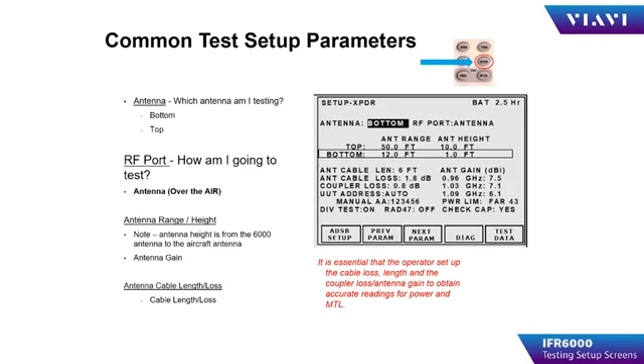When the operator chooses antenna for over-the-air testing, there are two important parameters. First is distance from the IFR6000 antenna to the aircraft antenna, and second, the height difference between the IFR6000 antenna and the aircraft antenna. These are critical to the IFR6000 for determining ERP and sensitivity.

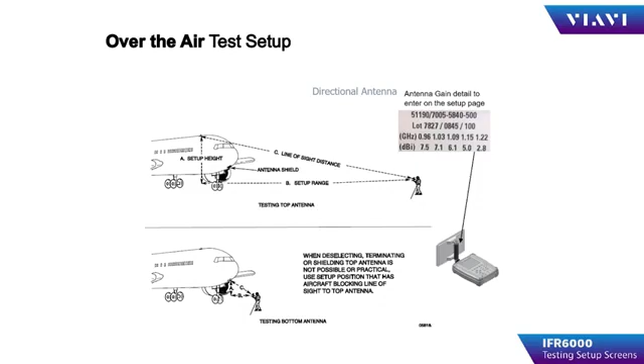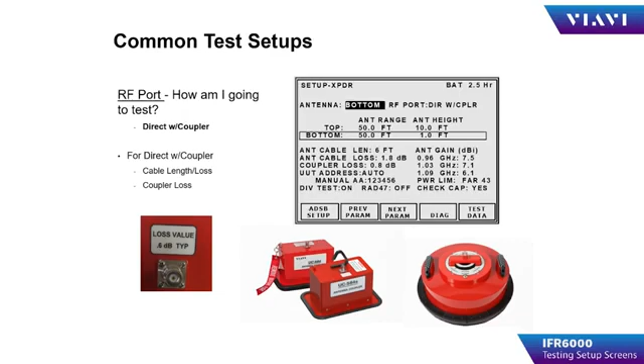The next method of connection is direct with coupler. Direct with coupler will allow the operator to use a coupler, for example UC584 or TC201A, to couple the test set directly to a test article. This makes for a more consistent and reliable test. It also reduces or eliminates ATC interference when testing near congested airspace.

When using the UC584, the coupler is placed over the antenna of the item to be tested. The coupler is pressed firmly to the fuselage, compressing the RF gasket on the coupler. Toggle the locking lever towards the fuselage to lock the coupler onto the antenna. Make sure to remove any oil, hydraulic fluid, or fuel on the antenna, or it will contaminate the gripping surfaces inside of the coupler, reducing the effectiveness of the clamping mechanism.

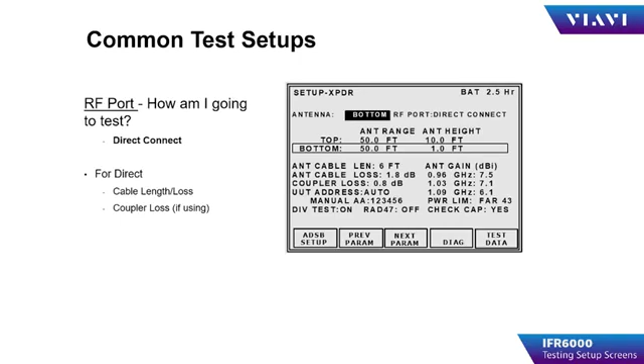Direct connect is the operator connecting directly to the UUT without the antenna connected. The exception to using this method is TCAS testing, which will not allow a direct connection to the test set. The operator must use over-the-air testing or a coupler for performing TCAS tests.

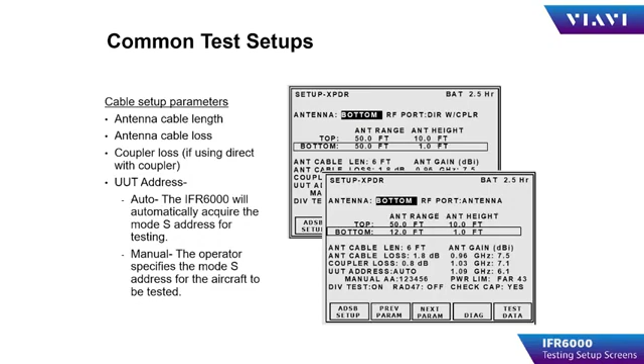Additional common test setups are cable length, cable loss, coupler loss if using a coupler, and UUT address in either auto, where the test set will determine what the Mode S address of the aircraft being tested is, or manual, where the operator specifies the Mode S address of the aircraft to be tested.

Items unique to transponder testing: diversity testing. If your transponder is a diversity type transponder, place this in the on condition. If it is only a single channel, then place it in the off condition.

RAD 47 is an Australian directive. It changes power, frequency, and MTL levels, and of course it's only used in Australia.

Power limits can be selected for FAR 43 or your 91.413 parameters, or it can be modified 43, which removes the upper ERP and lower MTL limits.

Check capability: place this in the yes condition so that it only tests the parameters that the transponder is capable of.

Two additional soft keys are diagnostics, which will allow the 6000 to be used for diagnosing problems inside of your transponder, and test data, which is where the operator has the opportunity to save, recall, or print test data.

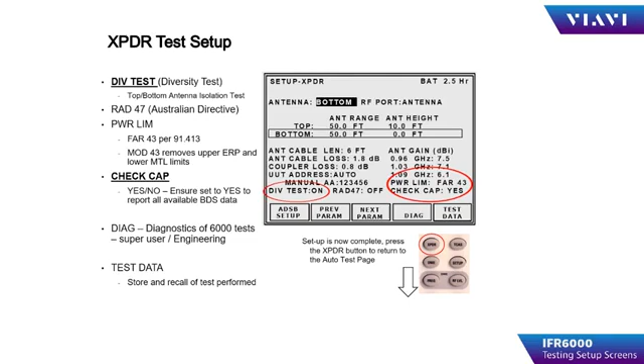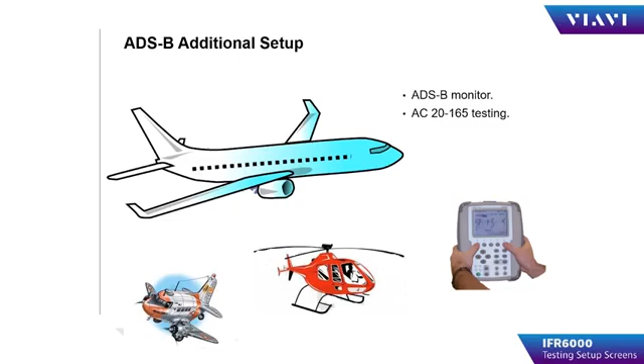ADSB additional setup. These are being used in the ADSB monitor test and the AC20-165 testing. Pressing ADSB setup in the lower left-hand corner of the soft keys takes you to the ADSB setup menu.

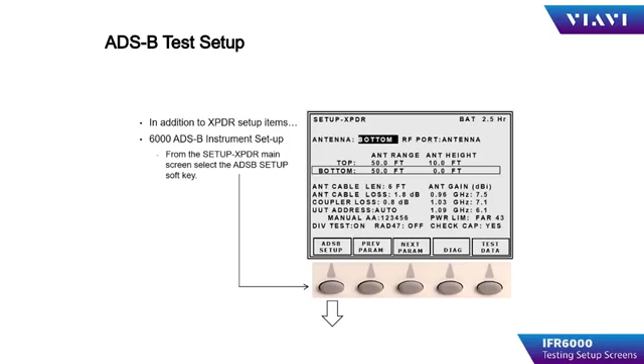ADSB setup consists of position decode, which can be either global, where the IFR6000 uses 2 consecutive odd and even squitters to determine longitude and latitude of the device being tested, or local, where it actually uses only 1 squitter and compares that to the parameters input by the operator for longitude and latitude into the test set.

Barometric pressure altitude is the test altitude that you're using on the aircraft being tested.

For ADS-B generator and monitor, you can choose either a DF17 or a DF18, DF17 being transponder type ADS-B compliant devices, and DF18 is just simply a beacon.

GICB, ground initiated Comm-B. The operator determines what type of interrogation is used in order to extract the information from the UUT.

For determining the longitude and latitude of your test, you can use your phone or the last known aircraft position. Unfortunately, though, these aren't the most accurate methods and can induce errors into your testing.

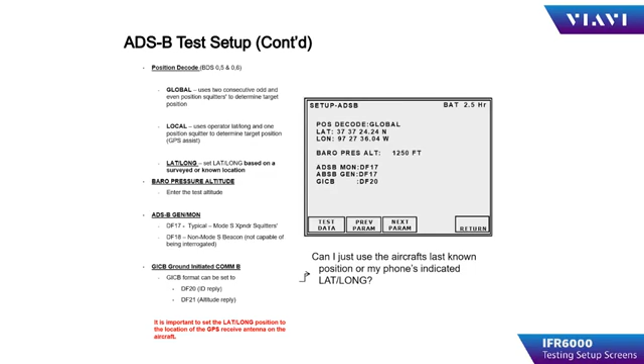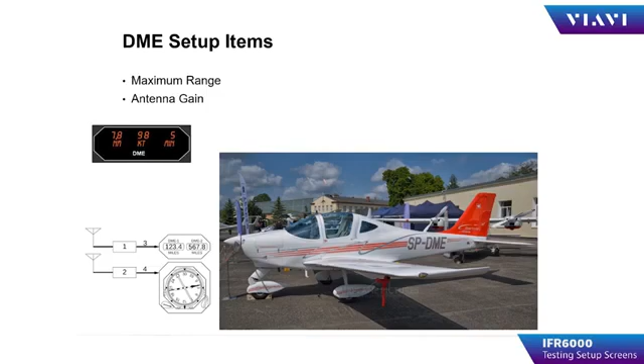DME specific setup items consist of maximum range for your simulation and the IFR6000 antenna gain. Unique setup parameters for DME setup are maximum range, which can be 10 to 450 nautical miles. This will set the test set's maximum range that it can simulate. Also, all of the parameters that are on the placard for the flat plate antenna must be input for antenna gain.

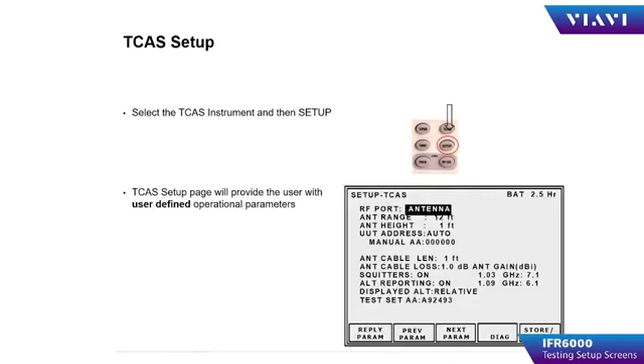Selecting the TCAS instrument and then pressing the Setup button will take you to the TCAS Setup page. The Setup page for the TCAS instrument will allow the operator to turn squitters for the simulated target on or off, altitude reporting on or off, and also will allow the operator to select displayed altitude as either relative or absolute.

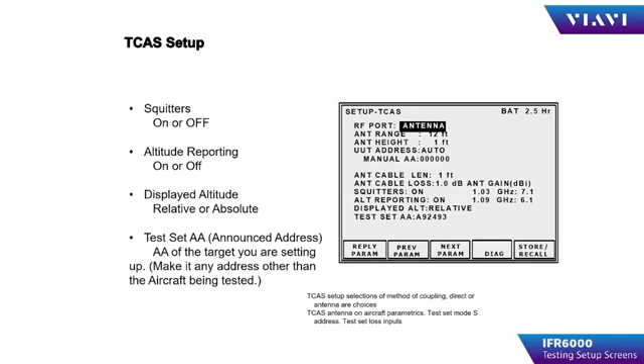Lastly, the test set announced address is input by the operator. Make sure that you don't use the same address as the Mode S address of the TCAS that you're testing.